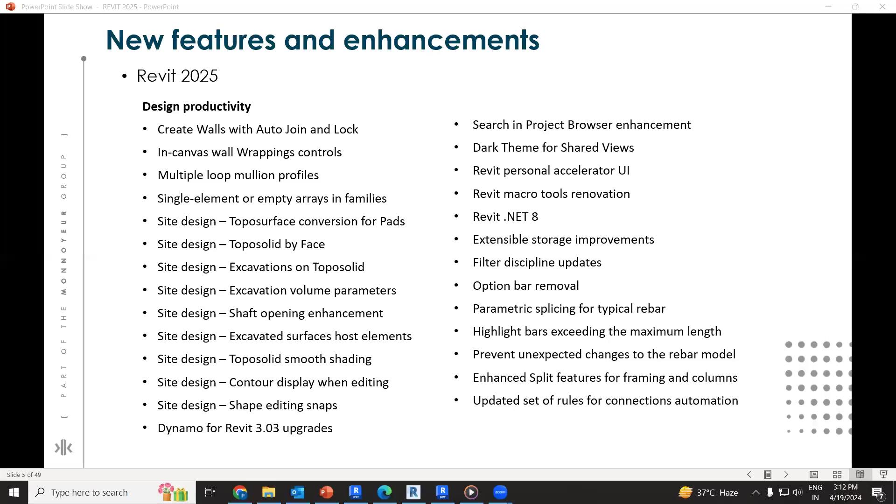This is divided into four to five parts. First we'll discuss the architecture features, then the structure features, then the basic analysis and sustainability features, and the last part will be model coordination, which is the most important thing once you are going for collaboration.

Let's see the architectural part, starting with walls. If you are creating wall finishes after completing all the brickwork in your project, generally what happens is once you're providing the plaster, your openings are not getting cut. You have to go for cut geometry or join geometry manually every time. This new feature comes in handy once you are creating finishes. It automatically joins the finishes layer with your brickwork, and if you have provided openings, all those openings will also be cut in the finishing layer as well.

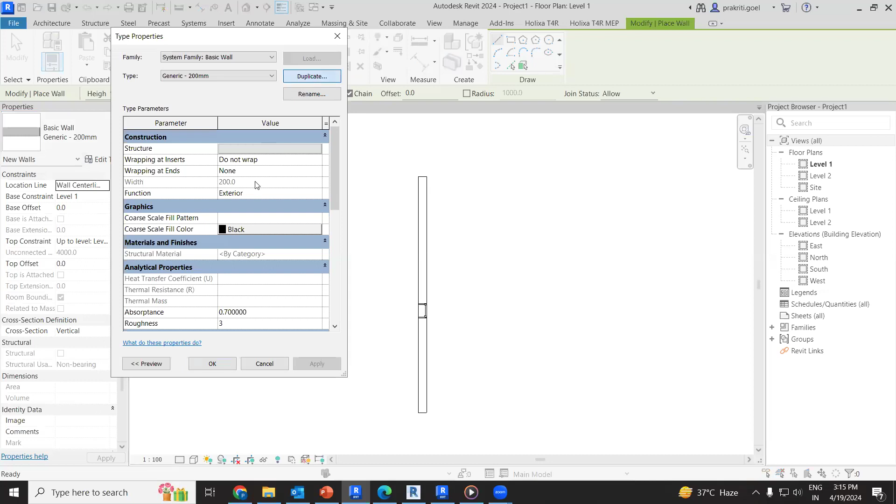If I'm placing the basic brick wall, and after that I want to provide the plaster layer, let's say you have already provided the window, and if I create the plaster as well. Now what I'll do is just place the plaster.

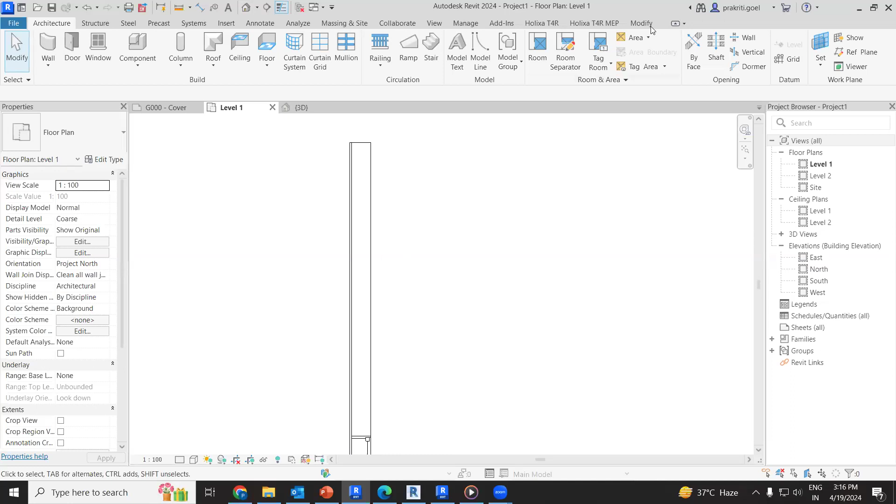So over here we don't have any option, we have to go over here and do it manually. By default, if you see, we have placed the layer, and right now in 3D you can see there is no opening getting cut, it is actually seeing overlapped. Now, in the previous version, I have to go to Modify, Join Geometry, then only your opening will be cut. But it has to be done manually.

So how is this beneficial? If you are developing the full project and you have completed it and now the finishing part is left, in the previous version it is difficult to join all the elements with the plaster walls. So this has been enhanced in 2025.

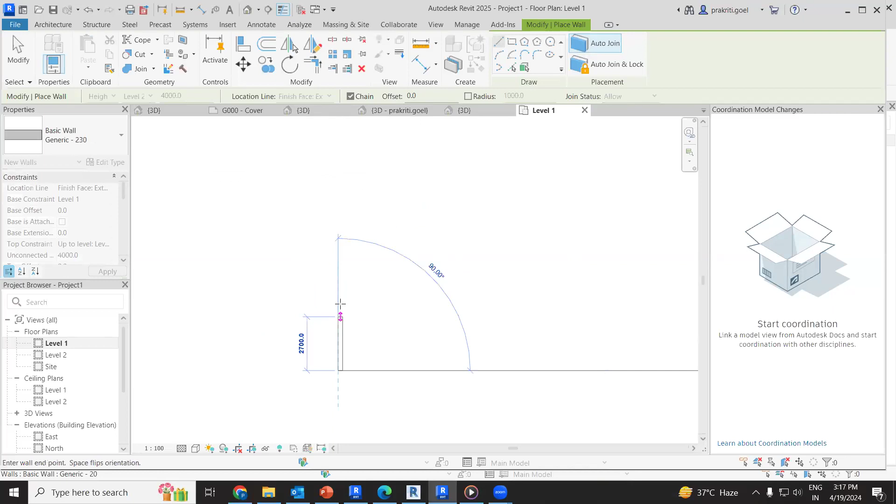So over here you can see, if I create a wall, if I create the same plaster over here, and then I'll place some window, and then I'll place the walls, the plaster wall.

So over here you can see in the Modify tab, we have Auto Join and Lock. You can actually lock your adjacent walls, the walls that are joined together. You can lock them as well. So let's see how this works.

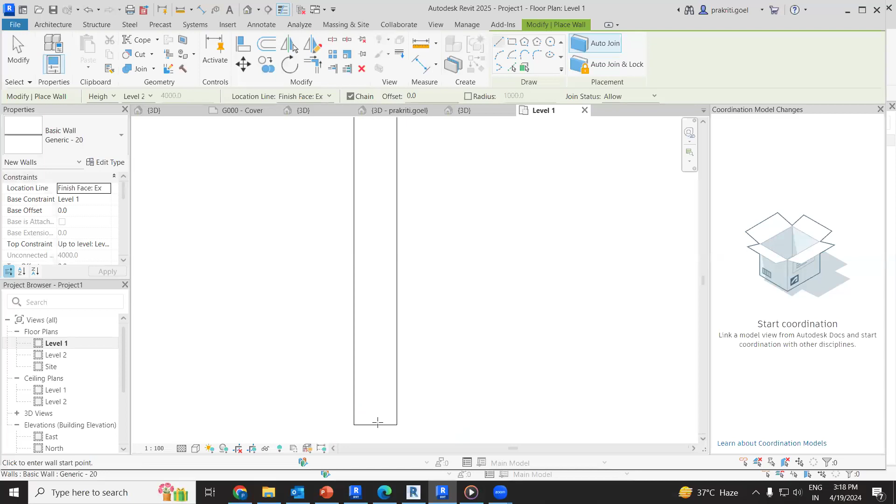So what I'll do is provide the plaster layer as well. So I'll be creating the plaster wall again. Let's create it, click OK. And now what I'll do is go for Auto Join, and then I'll create the wall. So you can see we don't have to go for Join Geometry anymore, and the opening is getting created automatically. So this Auto Join feature you have to enable it.

So again, if I go to maybe texture, you can see this is a separate wall. And if I change it... you can see, automatic join is actually very helpful in this case, especially if you are creating a full detailed model with finishes. So this actually helps in that case.

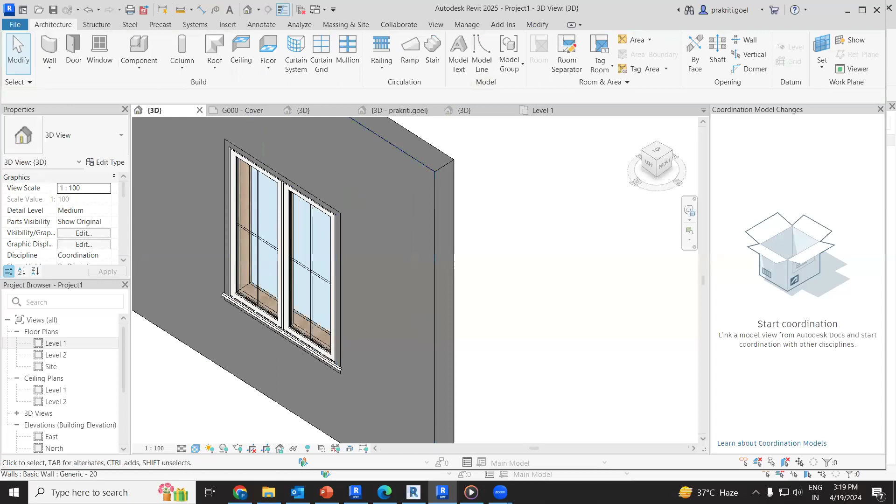Next, the second thing is the wrapping system. We all know wrapping has been there in the older versions. Why does this help you? Sometimes you are creating a wall and you provide wrapping on both ends, so it's your choice where you want to wrap. You can see at the ends there are two demarcations of the wrapping system.

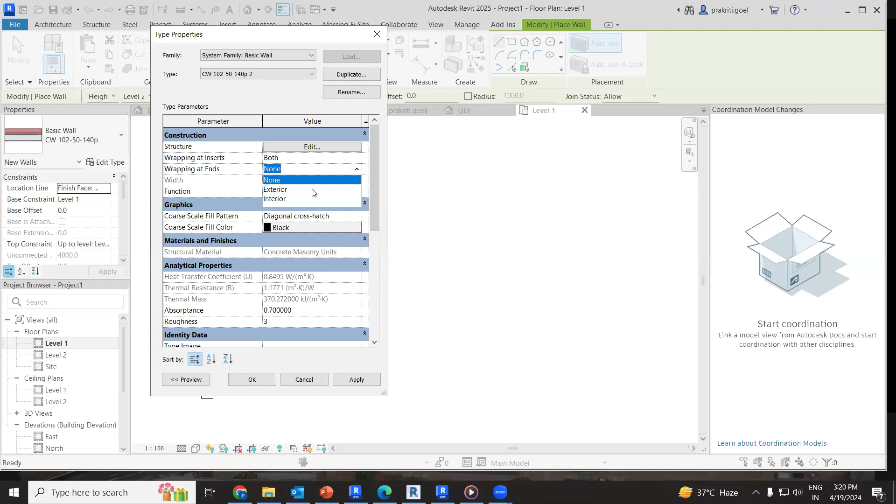So if you want to wrap or not, if I create a compound wall and wrap it on both sides, I'll go to Duplicate, then Wrap at Inserts, then Wrap at Ends, go for Exterior, and apply it. So you can see by default the wrapping is done, but I have the flexibility to change the wrapping system like this.

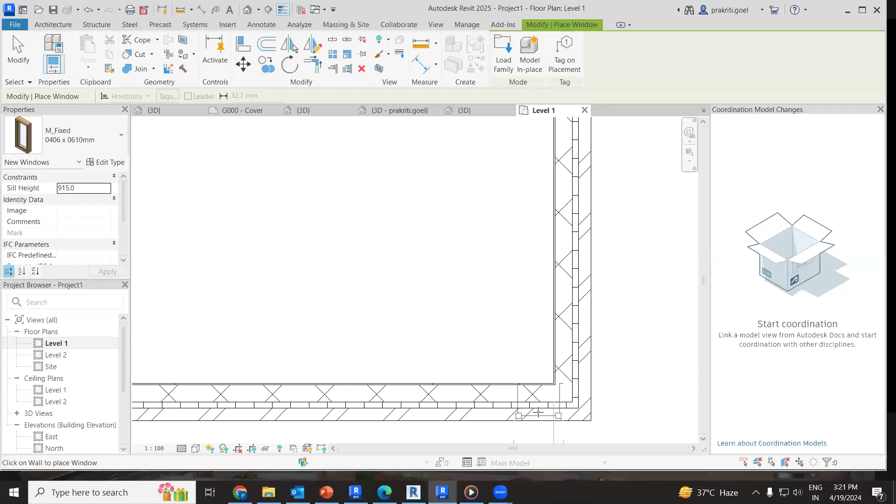So whenever you need those wrappings around the corner of your projects, if you have your wall with hollow cavity walls, and you are providing the joinery details of how your plaster finish is actually fixed, you can actually go for the wrapping system.

Next, I think this is the most effective enhancement they have provided in 2025, the multiple loop mullion profile. If you are developing mullions, we all know mullions are actually detailed, they are sections, box sections, certain box or circular sections are provided. But in Revit by default they are created as a rectangular portion, and in section in 2D you have to draft it, provide the details in 2D. But in 2025 you can actually create multiple mullion profiles in one single family.

So let's see how this works. If I create any mullion family, or if I just modify one, so I'll create a storefront.

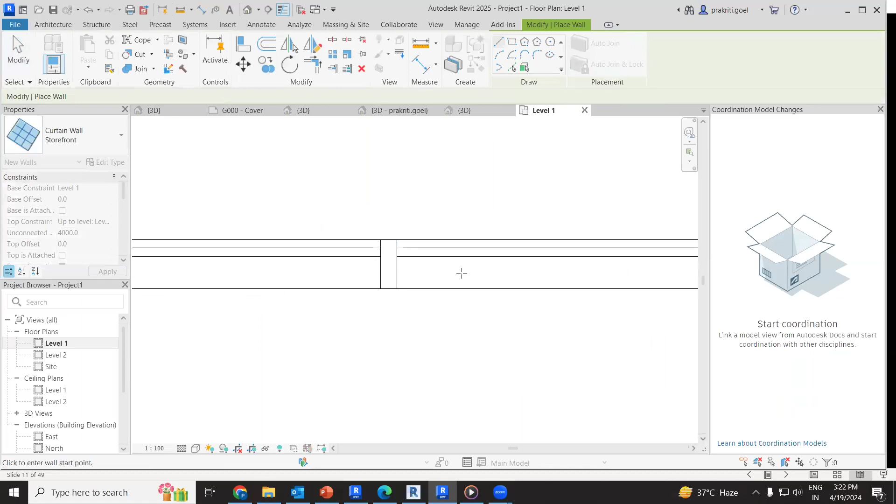So over here you can see only these rectangular mullions are there. Now I just want to edit them, so what I'll do, I'll just go for open. I'll just open the family over here.

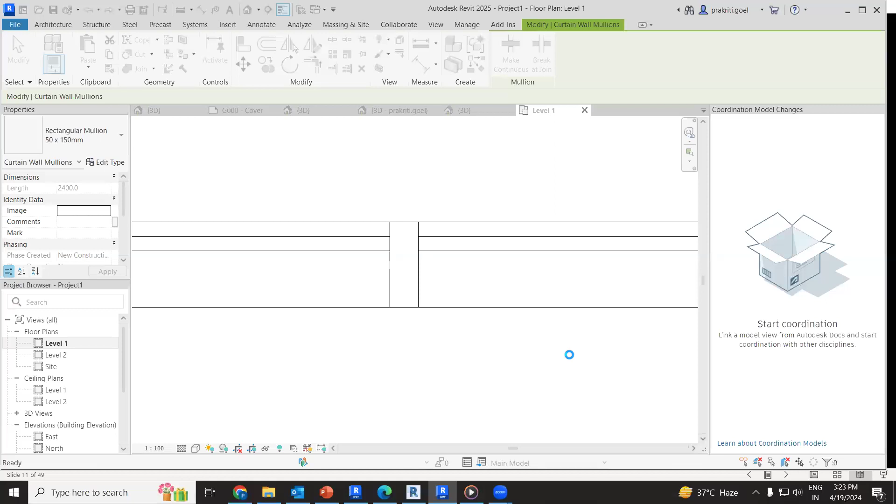So I'll just go for profiles, curtain walls. So over here we have mullions. These mullions are those which have 2D detailing. So if I open this one rectangular box, like if I open any family, you can see the detailing. This detailing is actually a detail item, like it is actually only a 2D element.

But if I delete this, you can see it is actually like this. So if you want to create a box section, you can do that. What I'll do, I'll go for create line, and then I'll go for offset. Let's say if I have the box section of like 10 mm or maybe 5 mm, or maybe 2.5 will be enough.

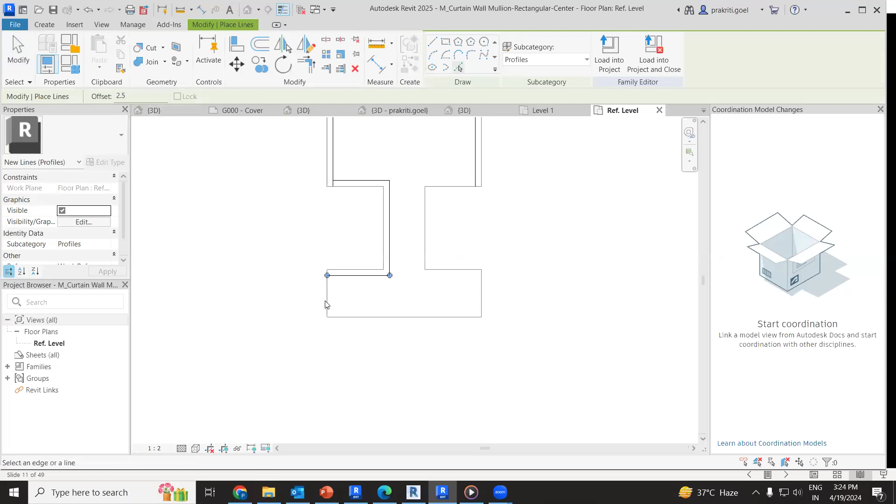So it is actually creating a multiple loop. And then I have to choose the same category, and let's say...

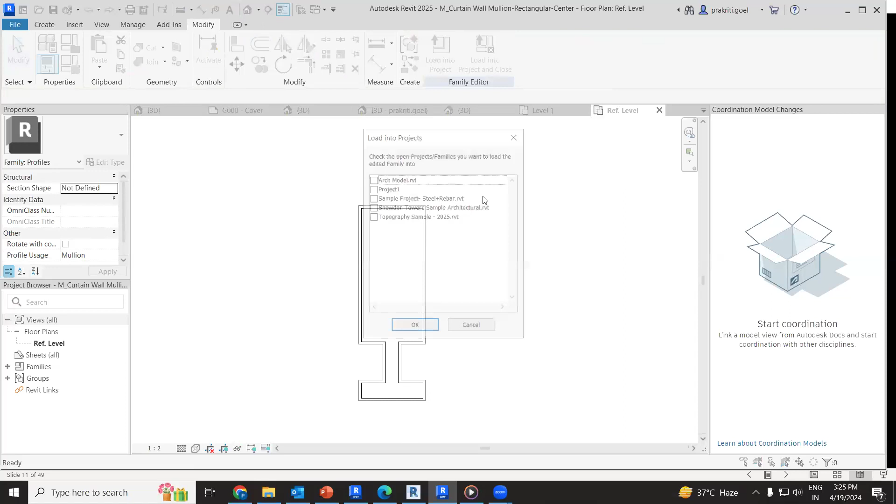Right now, what I'll do, I'll just load this into the project. So the project will be this one. Now what I'll do, I'll just specify the profile.

So over here you can see we have this profile default, so over here we have to choose that. This is actually center, so rectangular center we have modified it. So I'll go for apply, click on OK. Now you can see the difference, right?

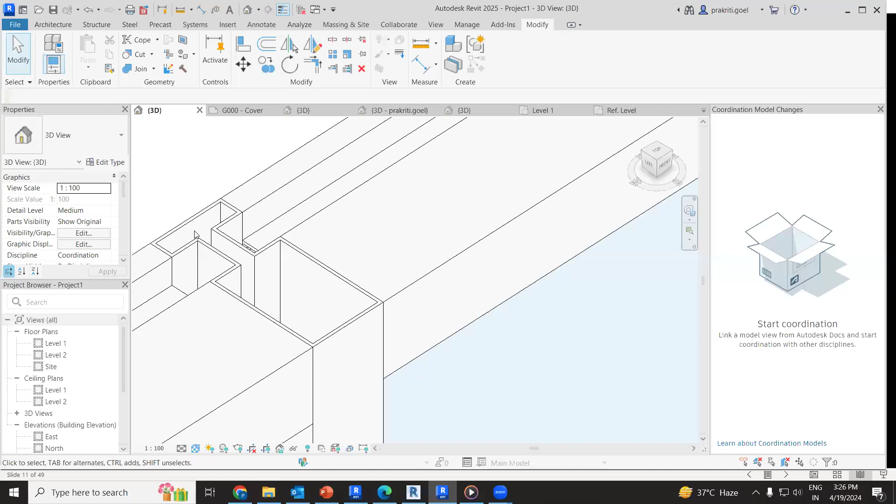So you can actually create detailed mullion profiles according to your project, which helps if you have intricate designs, so you can create it in a profile and it will be created. You don't have to go for a hollow section or solid box, and you can omit that detailing part as well. So everything that you are detailing is actually there. But again, if the lines are intersecting, it won't take. So remember, it should be a simplistic line, and the line should not be intersecting. So this is how the enhancement has been done in the 2025 version for the walls part.

Now the single element, like the array. So once you are creating array families, by default, if you place any chairs on the tables, the minimum amount of array we can provide is actually 2. But it is beneficial, like if you are creating a dining table set, 4 seater, 6 seater, 7 seater, in some cases you need a 2 seater as well. So in that case, how should we proceed? This single element or empty array in family can be helpful.

So if I open any family, just give me a minute. So I'll take this, and I'll change the sizes for the time being.

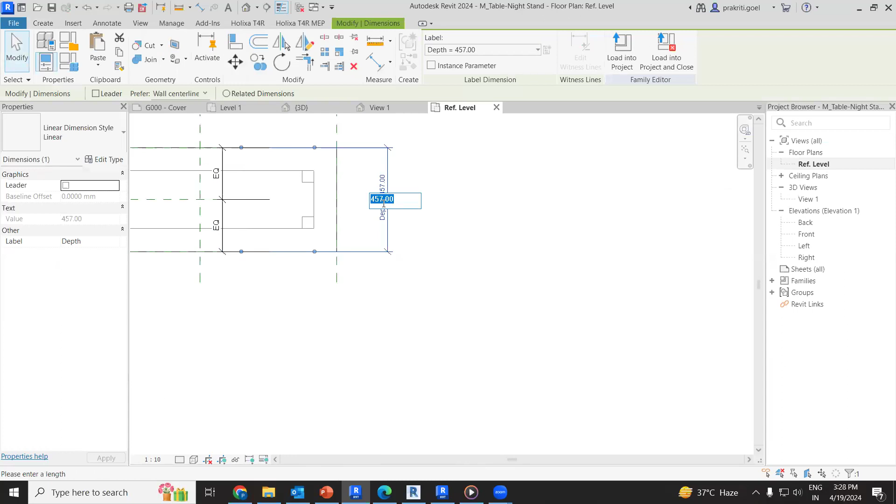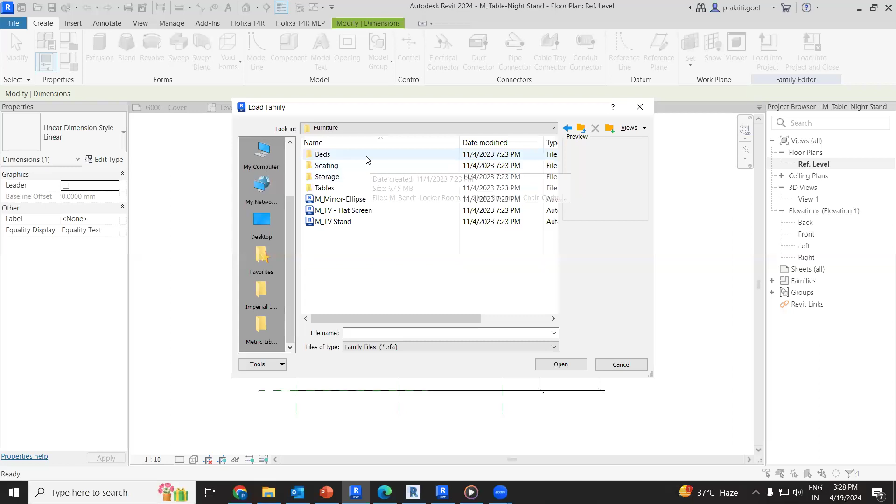After that, if I want to provide arrays of chairs, so this is the 24 version, you can see how we can provide the arrays over here. So the number of elements we can control if you are placing the chairs. Let me include the component as well, so I'll nest the component that is the chair family. I'll go for task chair and place it over here.

So let's say if you are providing like 2 meters. Now I want to place it, so let's not take this one, I'll just go for load family. Let's take this one.

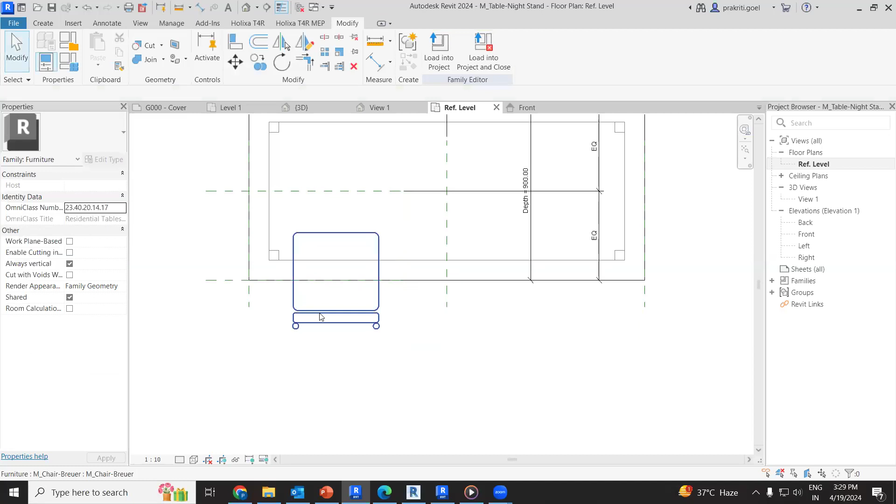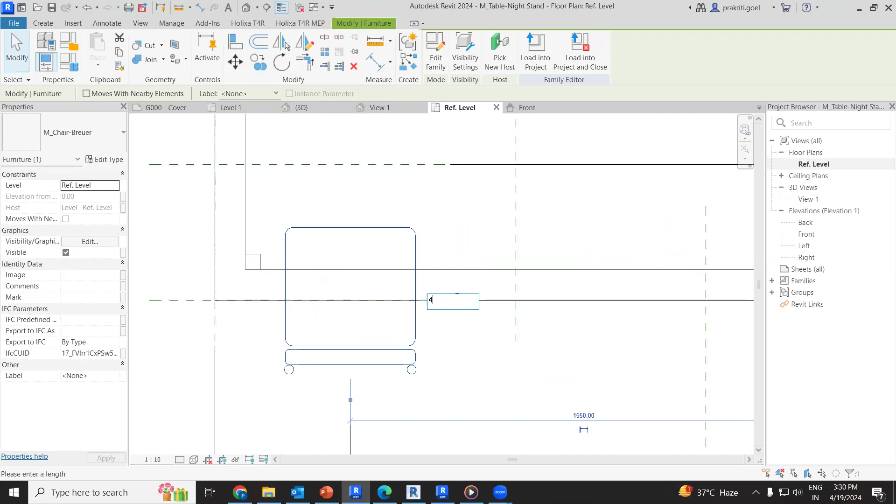So I'll just need to provide the placement, like where the chair will be placed. I'll just provide some reference planes. So I'll place it over here. So the first chair I'll be placing.

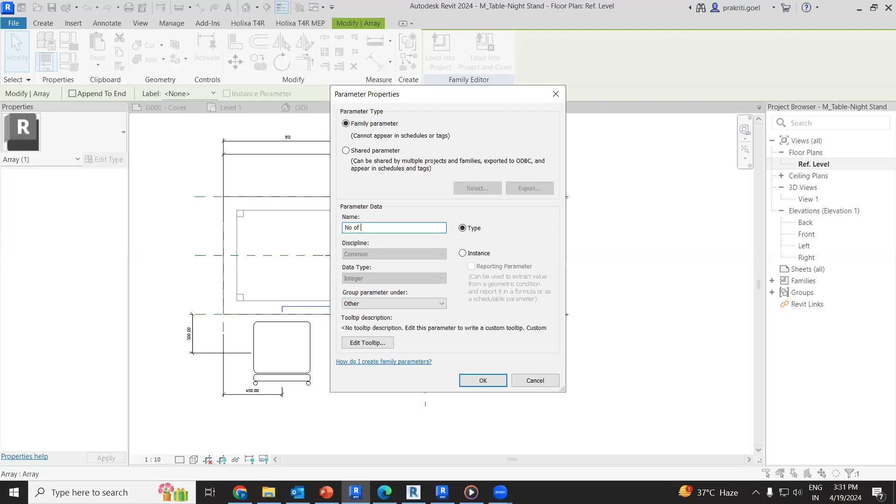Now, why I'm showing it in the family template is because this array enhancement is actually only in families, so that is why I'm showing this example. So what I'll do, I'll just go for array, then I'll go for move to last. I'll give this as a parameter. Now what I'll do, I'll just lock the position of the chair as well.

Now, if I change the number of chairs, as you know, by default the minimum value of array elements is actually two. So if I provide one, it shouldn't work, right? But in 25, it will work. First of all, you have to understand this is actually the 24 version. So what I'll do, I'll just save this family, and let's open it in 25.

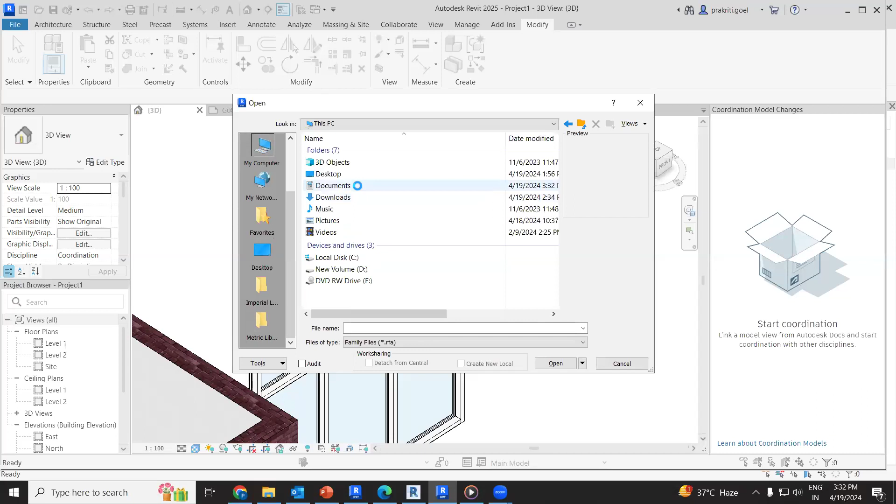So I'll go for downloads, like documents. This is the one, so I'll open it. It's actually updating, right? So I'll continue this. Now what I'll do is just change the parameter to maybe one.

Just observe. You can see over here. You can actually go for visibility turn on, so only one chair will be visible. So again, it is more efficient for creating two seaters or maybe three seaters.

You can actually go for multiple permutation combinations for a single set, like a conference table set or maybe dining table set. So using this type of families, you can create multiple portions. If you are developing a baffle ceiling, at certain length only one baffle will be there.

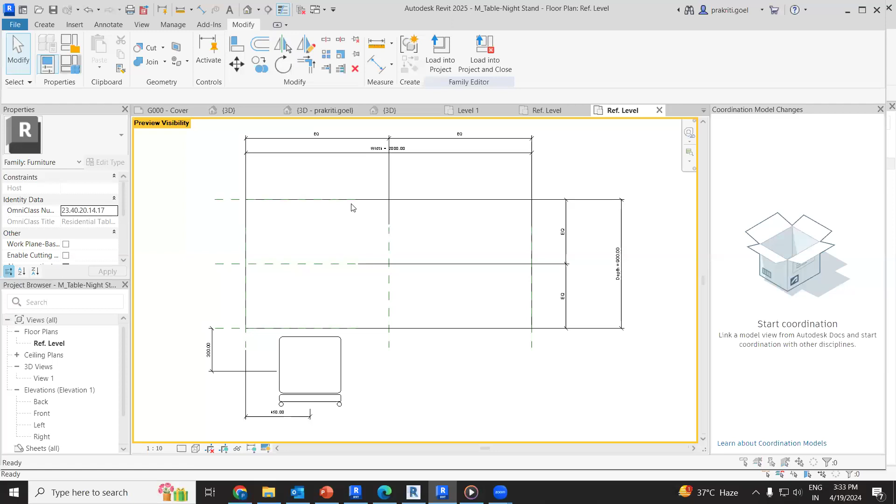So again, you can create multiple permutation combinations using this single array or empty array also, and you can actually provide zero information, zero number of elements as well. So you can see that. This is one enhancement in the family creation.

Next is the major thing, that is topo solids. As you know, topo solids are there from 2024 onwards. Now certain parameters, certain things which were not there - like if you are creating building pads in your sites, if you are developing your site providing hardscapes and softscapes using building pads - generally what happens in 2024, the building pads are not converted.

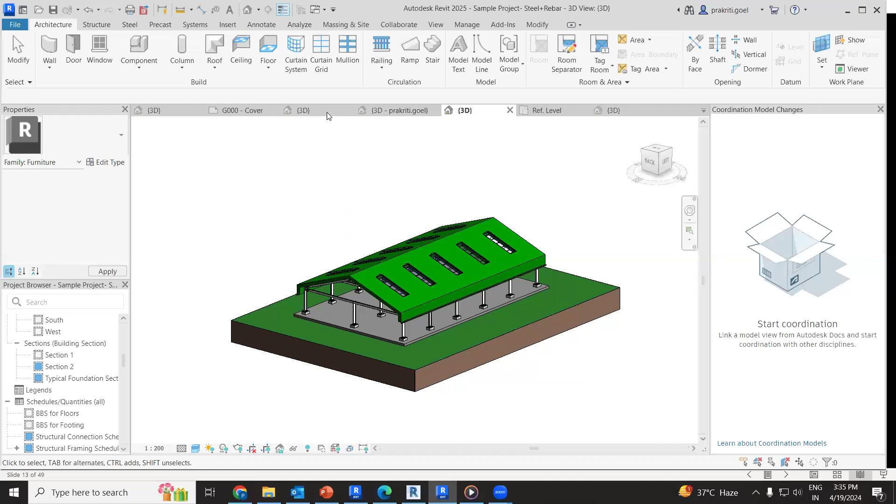So generally if you convert any topo solid, the building pads will be deleted. So if I show you over here, this is actually your 2025. So if I open the site view - this is the topo surface, the topography from the 2021-22 version, and I have just opened that same file over here.

Now, right now, because this is your topo surface and we have created a building pad over here, you can see we have a building pad, right? So if I open that sample file, you can see this is the topography sample. Over here, we have provided the site, we have graded it so that we can get the exact cut and fill volume, and you can see over here we have building pads. This is the building pad. This is a building pad.

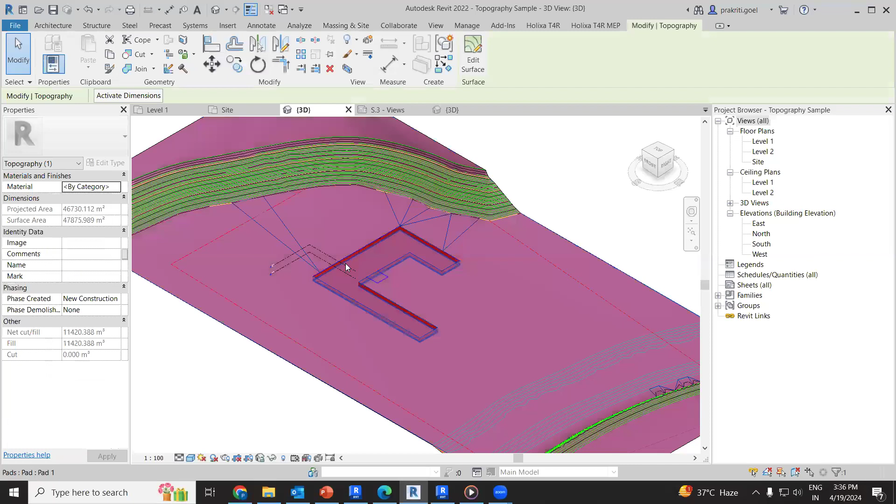Now, by default, if you open the same file and convert it to TopoSolid in 2024, the building pad will be gone. So it will be a difficult task to provide the excavation.

So now in 2025, if you see over here, the same file has been opened. Now what I'll do is go select the topo surface - I'll select all the topo surface. So you can see we have two topographies over here: one is existing topography and one is site proposal. I've graded them in the earlier version.

So what I'll do is select the old, the existing topo surface, the existing site, and convert it to topo solid. So from here, generate topo solid will be created. Right now it is saying - just observe what it says over here.

When generating a topo solid, consider the following: subregions are converted into topo solid subdivisions, building pads are ignored, railings are rehosted automatically, other hosted elements need to be rehosted. This kind of notification comes in 2024 as well, but what is the difference over here? So if I click OK...

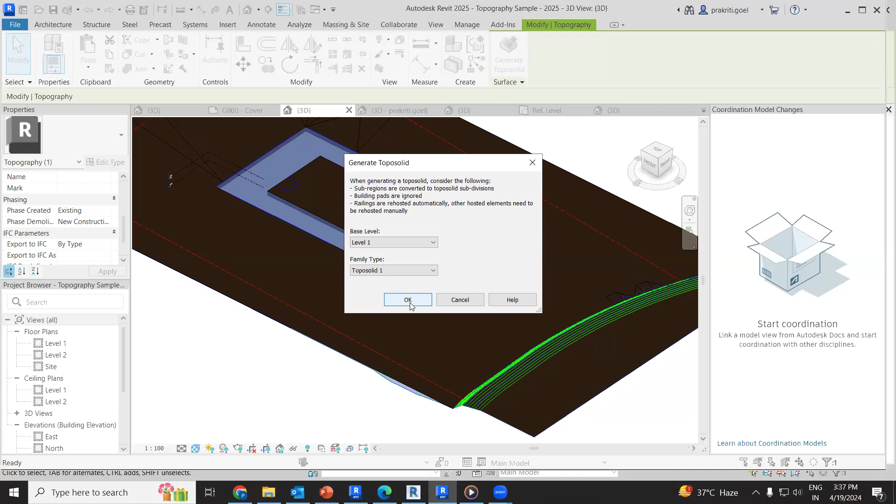So you can see, first of all, this is the existing site. Now what I'll do is just hide it for the time being. And this is our original site. Let me just go and convert it again.

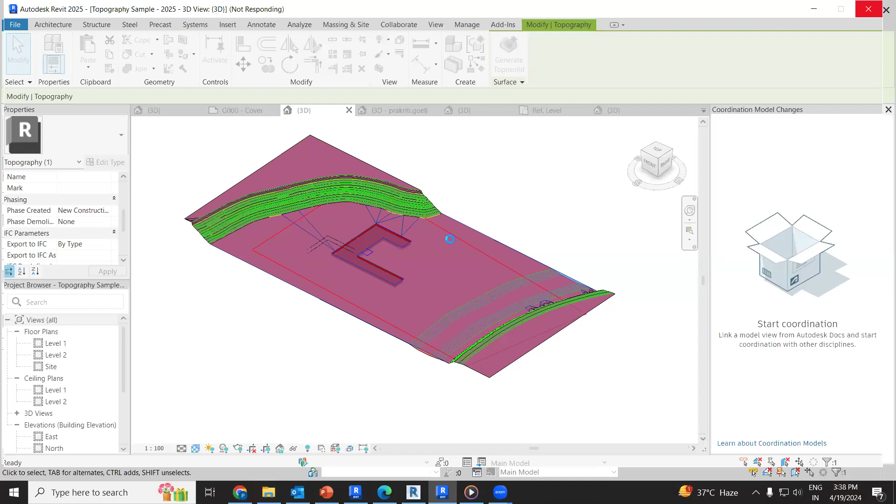And just observe the building pad - just observe the building pad. So that building pad will be converted as an excavated area. So your building pad's whole component will not just be shifted and converted as it is - it will be converted as an excavated area.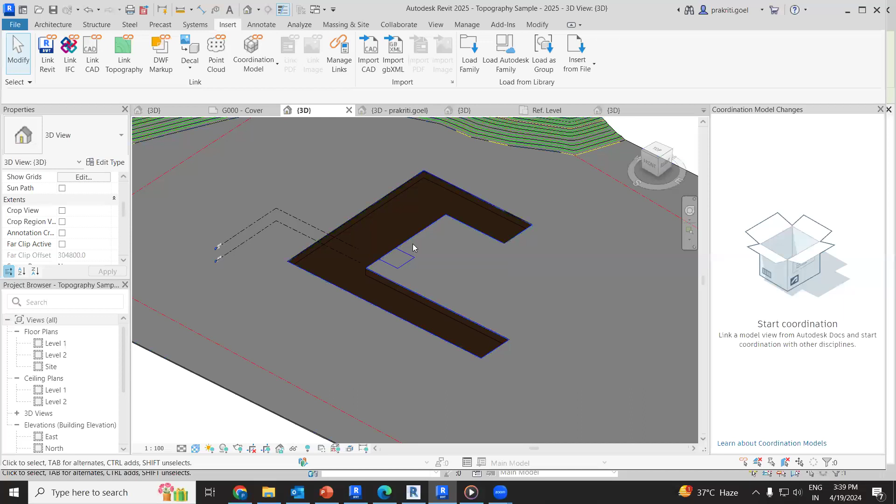So as you can see over here, the excavation has been done. So the building pad is gone, but again, if you are converting a site which was created - if you're converting the site over here, just observe, if I create a section over here, you can see that the excavation area is actually created. So this is your excavation area, as you can see over here.

So building pad as a component will not be converted. What happens is they've used a concept called excavation area. In 2024, only subdivisions like sub-region and split surfaces would be converted, but now the building pad is also converted into a different component, that is excavated area.

As you can see, the excavation is actually over here. But if you want to provide excavation, how does it work? You just need to provide a footprint, like if you're providing a PCC layer for a raft foundation or any foundation, you have to provide that layer and the height offset. So let's say if I'm providing the PCC over here.

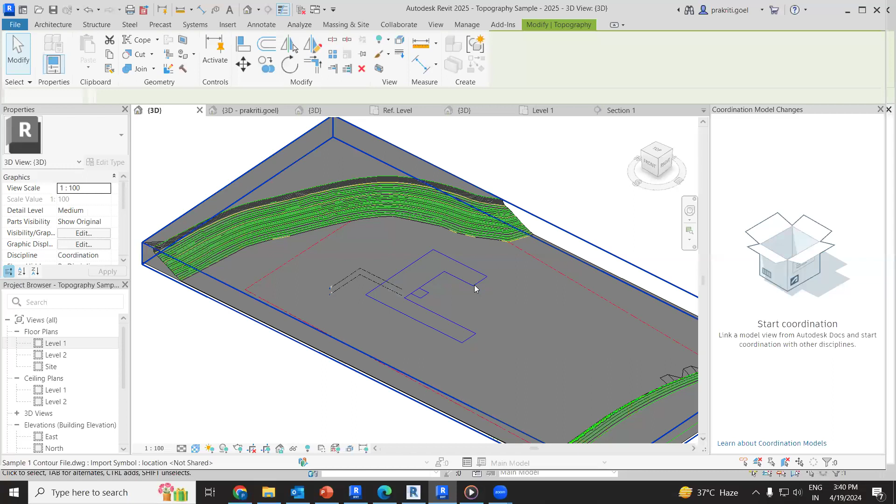Right now let's delete this excavation area, excavated area. So what I'll do is create the floor plate, like the PCC layer, and then I'll provide the height offset. So what will it be if I have a basement over here?

First of all, I need to provide the layer, so that will be like maybe 3 meters, and above that we'll have the rammed earth, and over here we'll have the grass, so sand and grass. Let's say this will be maybe 50 and this will be 100 or 250, and let's say this will be grass.

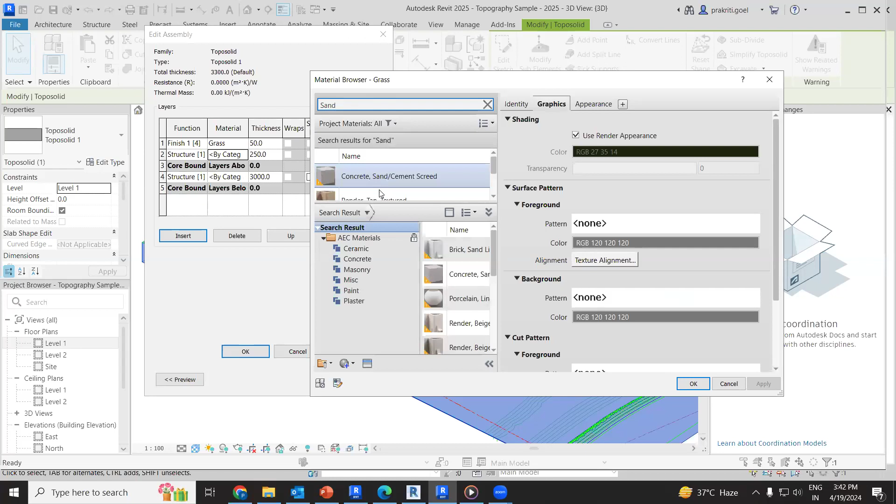So I'll use it over here. This will be, let's say, sand, and so on. Click on OK.

So what it will do is create the solid layers, and then what we can do is just go for the...

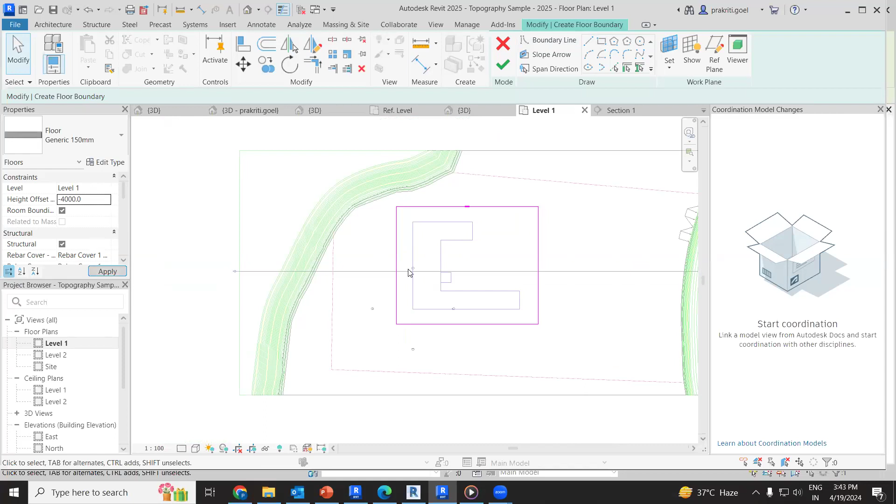Now, in this case, what I'll do is provide a slab where I'll give the PCC layer, and then provide, let's say, if this project has a basement, it will be like 4 meters, minus 4 meters. Click on apply, click on finish.

Now what I'll do, it is actually overlapping. So what we can do here is go for excavate. I'll go for excavate in the modify tab, toposolid shaping, and we have excavate. If you select the toposolid, only then will that excavation part come. You can remove that excavation and actually go for excavate.

Right now you can see the cut and fill volume, because we are modifying it in the new site, so we have the volume as well. So if I go for excavate, I'm selecting the file, I'm selecting the slab.

You can see over here, if I go for a shaded view, you can see that portion has been excavated. First of all, I have to change the range. This will be 5 meters.

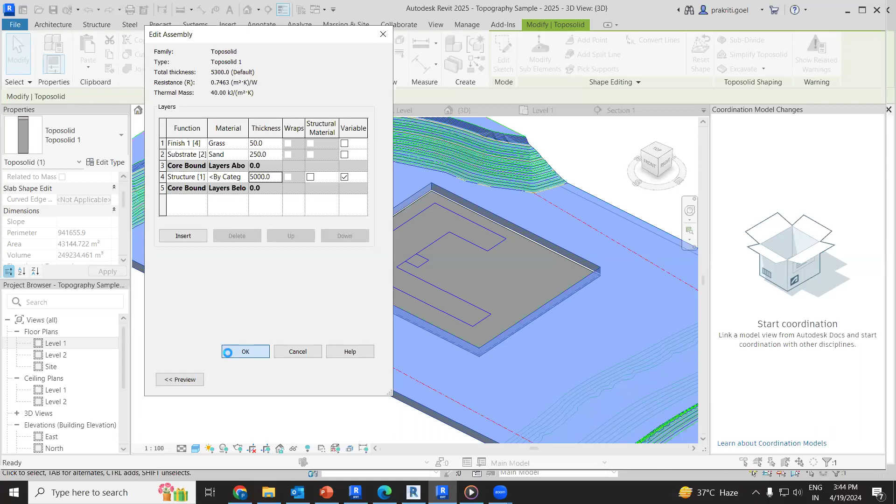Now what I'll do is go to the section. You can see the excavation part is over here, and you have this PCC layer. So again, it is now more accurate to create your site developments, now more accurate. So again, you can see over here.

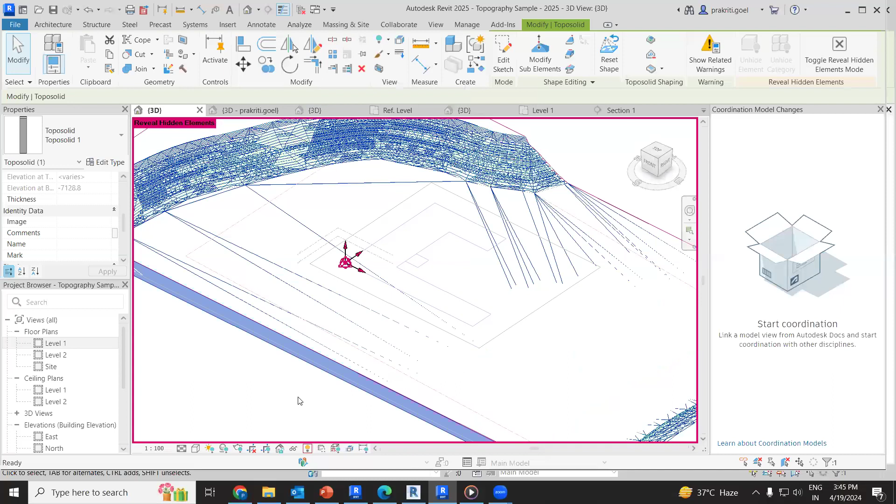Right, so I have highlighted it. So you can actually go for individual excavation. If you have multiple towers, you can get how much each and every tower has excavated, and get the excavated volume as well. So this gives you the exact cut and fill volume of the site.

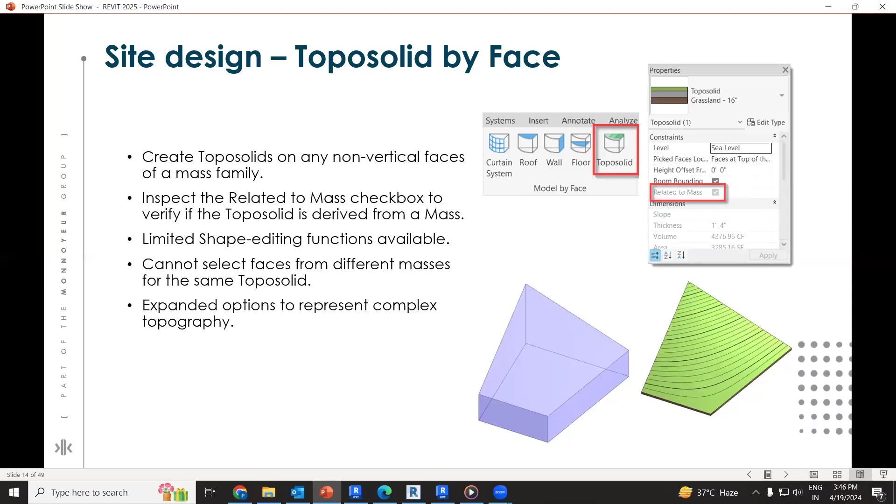Next, a few enhancements we discussed: if you have created the site through massing, massing can also be converted into a topo solid. We have in the model by face panel, topo solids.

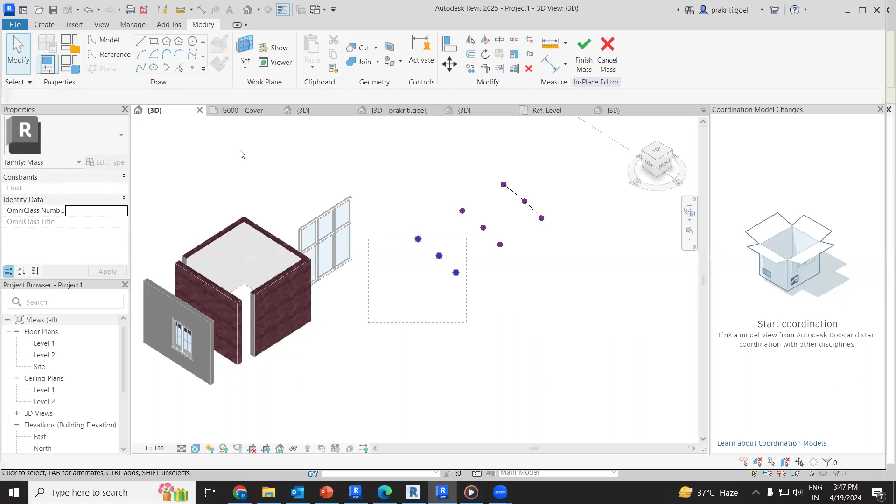So again, if you have created any mass, let's create it over here. If I go to in-place mass and go for point-based massing, where we use points and then connect them together, and I'll just connect it.

So any contour shape, any smooth contour shape you want to create, you have to just create a mass and then go for the massing and site tab, model by face panel and topo solid. Then you can select the face, select the mass, and go for create topo solid. So your topo solid will also get created, and it will be updated according to the mass. If you make any changes in the conceptual mass, your topo solid will also get updated.

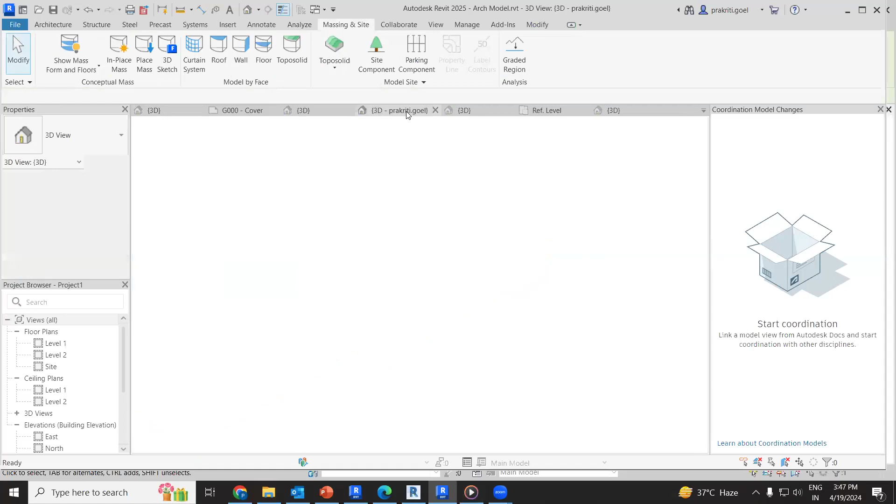So this is the enhancement for the site developments. And if you want a smooth curvature, like smooth contours developing, so if you want your contours to be smooth, if I open... let me delete this CAD file.

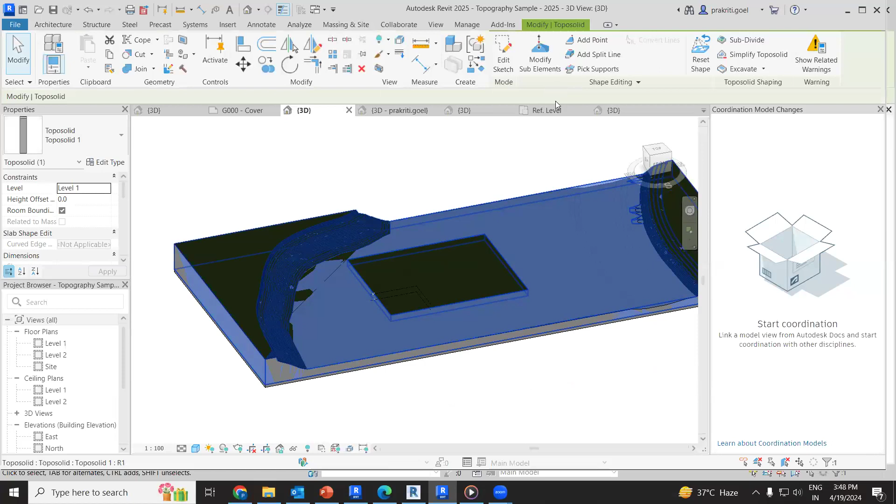So over here, you can see the lines are actually there. If you want a smooth surface, you can change that as well. If you select the surface, in the shape editing panel you can go for simplify topo solid. You can simplify them according to the points. That is a new tool for topo solids only. You can actually go for that over here.

Okay, so over here you can see if I go for shape editing. If you are creating a building part, like a building or building footprint, you can align your points accordingly.

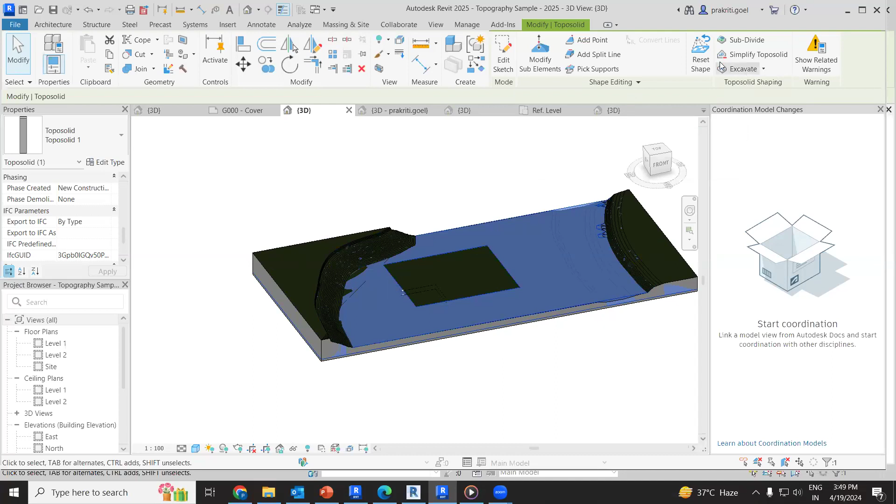Now you can see over here we have, in the massing and site tab in the model site panel, topo solid smooth shading. Over here you can see that the line work, the representation of your topo solids, will get smoother. Right now the contours are not that many, but if you have a vast number of contours, the surface will be smooth. So more enhancements are there in your site development.

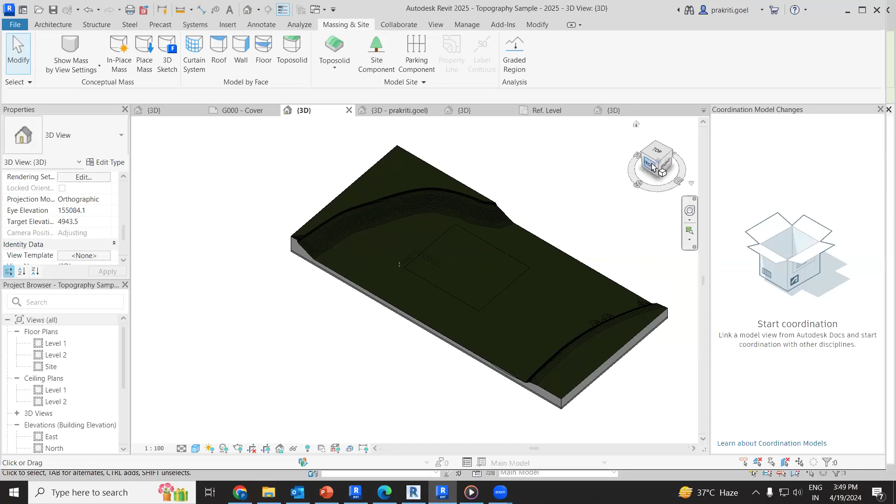After this, we have discussed the topo solid part. Now we'll discuss the working drawing. This is important: if you are developing various sheets, you can collect them and group them according to the design stages, like conceptual stages, based on what type of drawings are there. So you can create sheet collections, and create a schedule out of that.

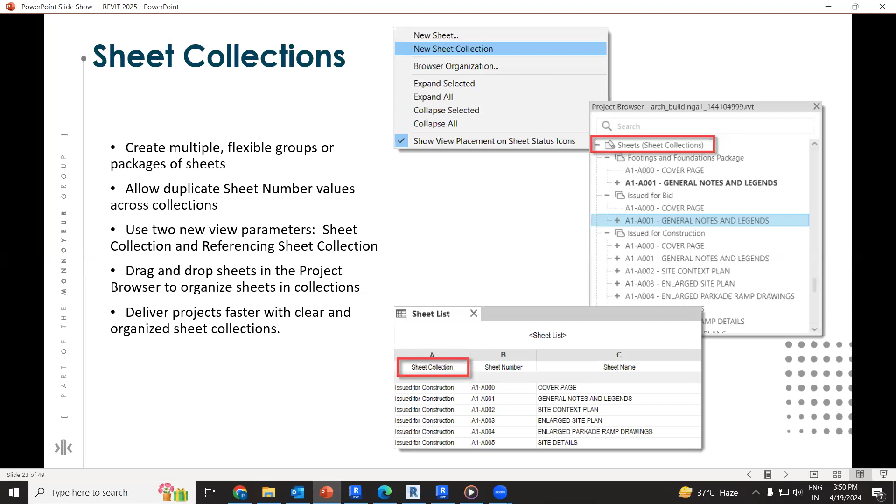If I open a project which has all the sheets, you can see in the project browser we have various sheets, like for working drawings and presentation drawings. You can group them according to stages or according to discipline. If I right click on sheets, we have sheet collection, which is a group in which you are grouping your sheets. If I go to new sheet collection, I just need to type in the name - let's say conceptual, presentation drawings, or working drawings.

So whichever is the original sheet collection, whatever sheets you've created, you can see which sheet collection they are actually in. What I can do is select a few sheets, and then change their sheet collection property over here in the property palette. I'll go for working drawing now - just observe, it has been shifted. I'll change it again over here, like this. So you can group them according to design stages as well.

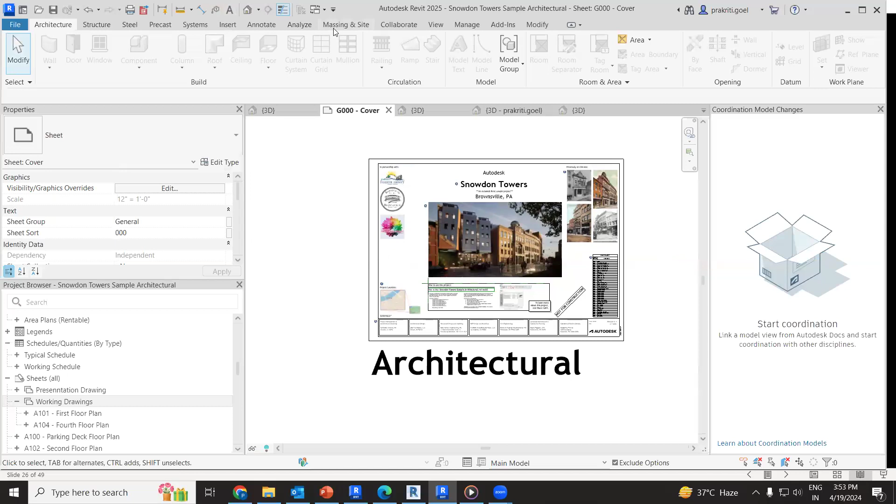Now this important feature that you are seeing, the render appearance - how your material will look after render - in 2025 is the most amazing feature. If I go to the manage tab, settings panel, materials, and select any material, your appearance will change according to the render quality.

So over here if I select this one, maybe this one - let's go to appearance. Right now you can see how this appearance will look. We have render settings, and this is actually quick render. If I go for draft quality, the settings will change.

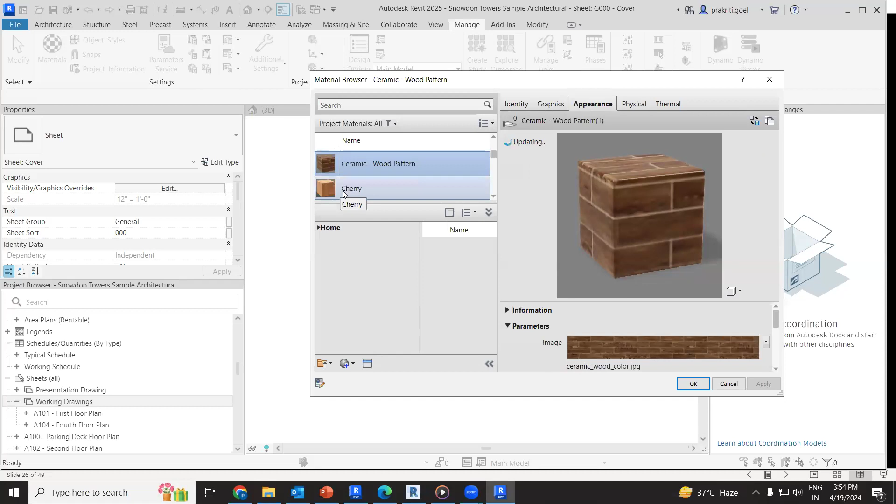Because it is actually rendering the whole material, you can see the difference, right? So you can actually perceive better now how your material will look after you have created high design, high render quality. So if you go for production quality, it is actually fully rendering the material, right? This is how it actually works in the 2025 version, right?

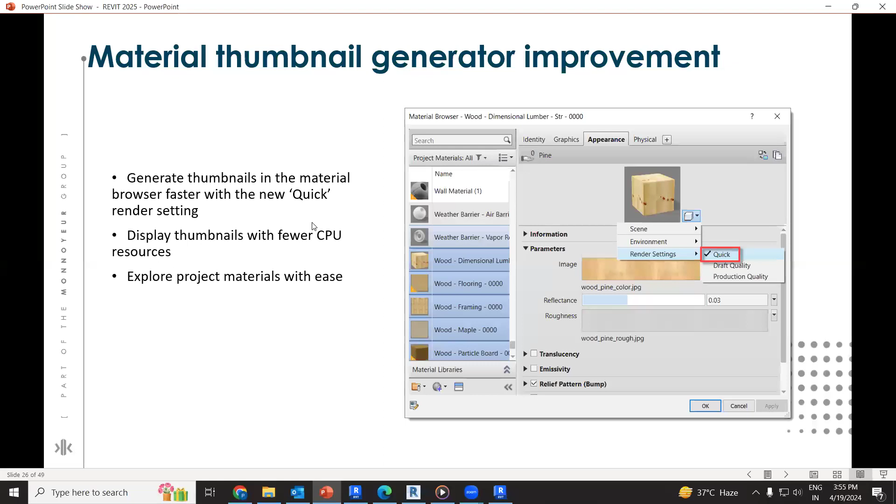Next, if I talk about alignment, so if you are providing tags, you can actually align them together. We have multiple alignments, like center alignment, right side and left side, right? And all the tags that you have created will be aligned together.

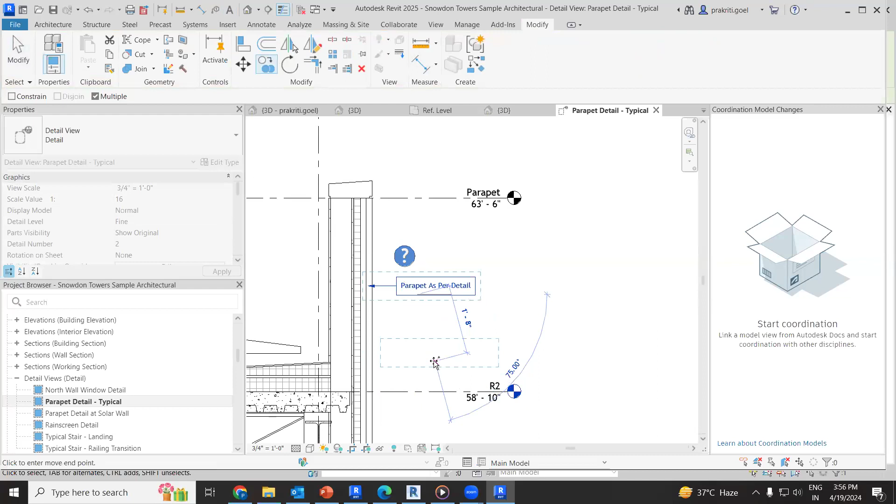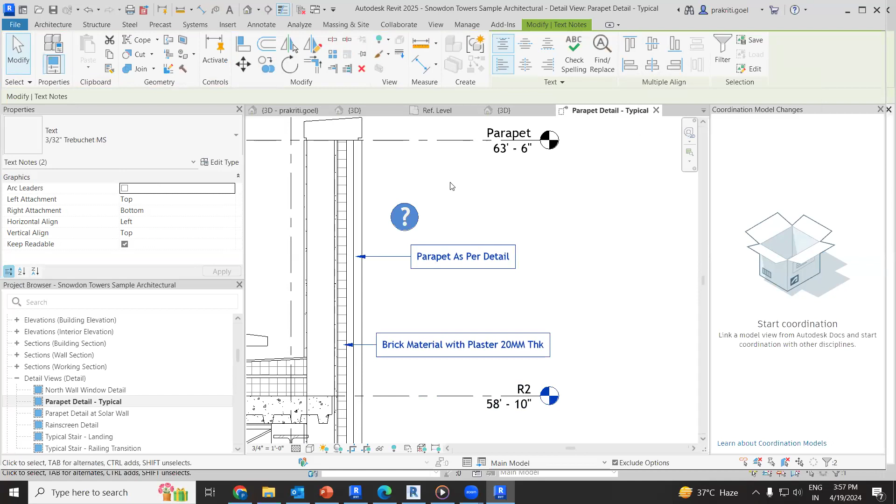So let's say, if I provide any tag over here, any text-based information... so it's like that. If you are providing all the information, now what I can do is select these tags. Whatever text-based information you have, tags or text, you can select everything and then go for aligning. Over here, multiple align. If you go for alignment, again you can see the texts are actually aligned according to the center of the placement, center of the text, right? Similarly like this, right?

So in one go you can actually select multiple alignments, like this, right? So these are the basic enhancements that you have in the architecture part.

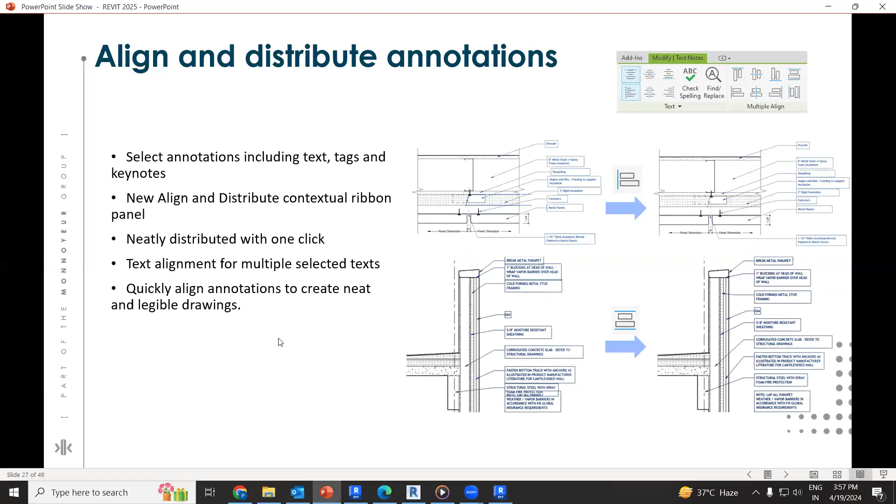One is the batch export — if you are exporting your PDF, it shouldn't stop you from working, right? In the background the PDF exporter will be carried on, and once it is completed it will give you a notification, right? And the room perimeter accuracy has improved — if you have a curved space or a regular room space, your perimeter and area calculations are now more accurate. So again, these are the basic enhancements in 2025.

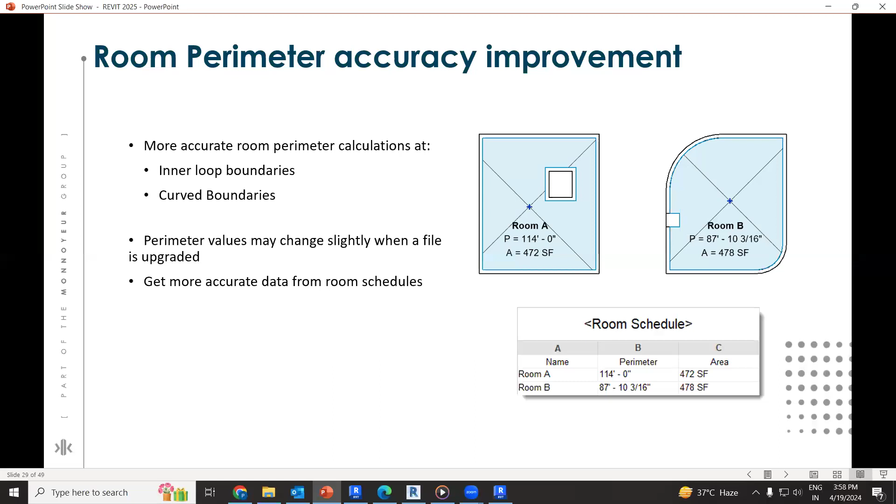Now we have another thing, the Revit Personal Accelerator, to accelerate your project. It accelerates your speed, your project delivery, right? So it optimizes performance when working on Revit cloud models — basically it is for cloud models, right?

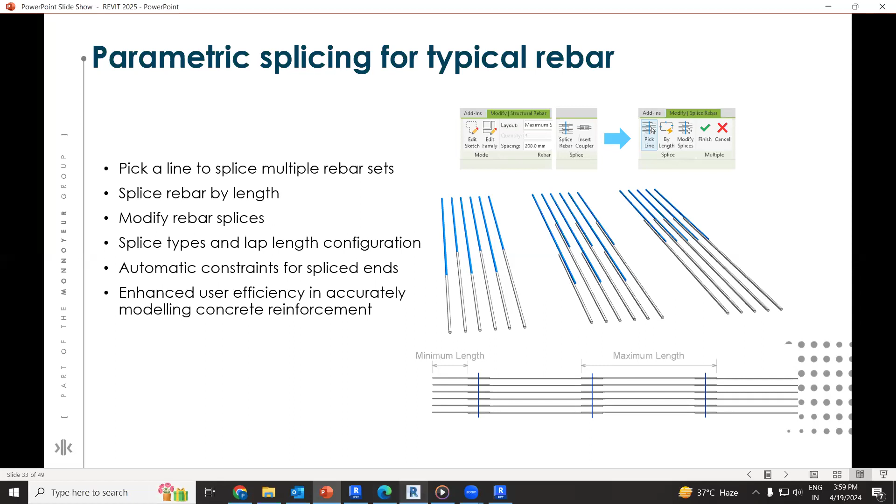Next, let's talk about the structure part, where we have all the rebarring, and the steel connections, right? So again, all the enhancements are there for rebar, like if you want to splice the rebar. So if I open any rebar project...

First of all, in 2025 the major change is the interface. If you see over here, in 2024 you will not find that new Revit Home option. So if I turn this on, the full interface will change — the homepage of Revit will change like this. Even for cloud projects, that will also be changed.

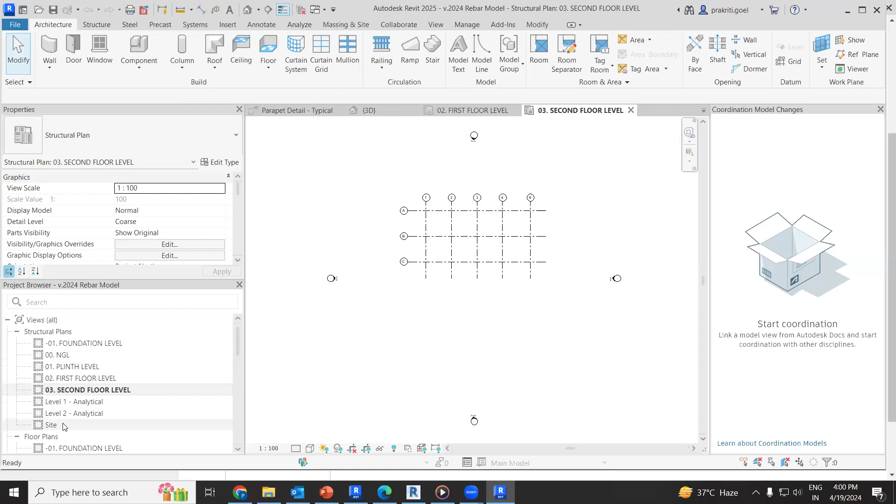Wherever you need couplers, right, what you can do is actually split the rebar segments according to the length. So if I go to any maybe 3D model, will be okay. So over here, you can see these are the like we have. So if I go to any section...

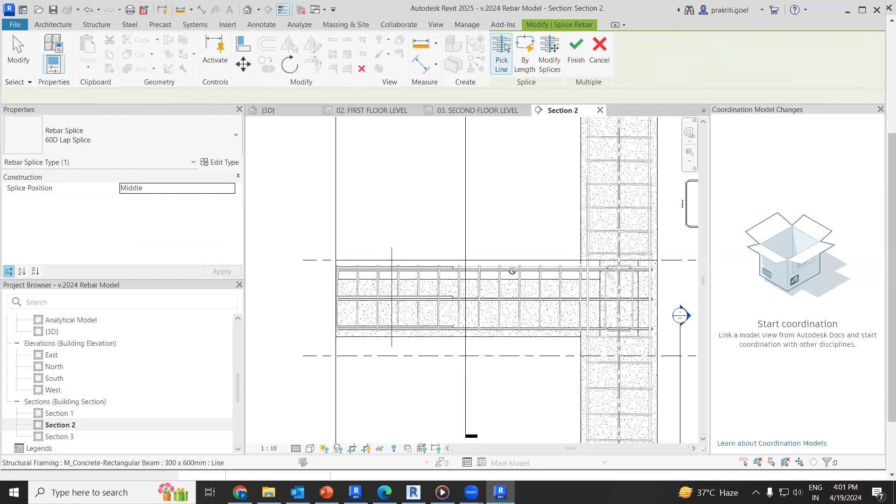So if I want to split the rebars, right, what I can do is select the rebars, and over here we have the splice option. Splice can be done through length as well, right. So by length, and over here you can see how the rebar has been joined together like this. So the rebar has been spliced together, and now you can actually provide the coupler over here, right.

This is one thing. Now for tagging perspective, it is actually nice. So like in 2024 there's bar bending detail, right? Over here the slight enhancement is there.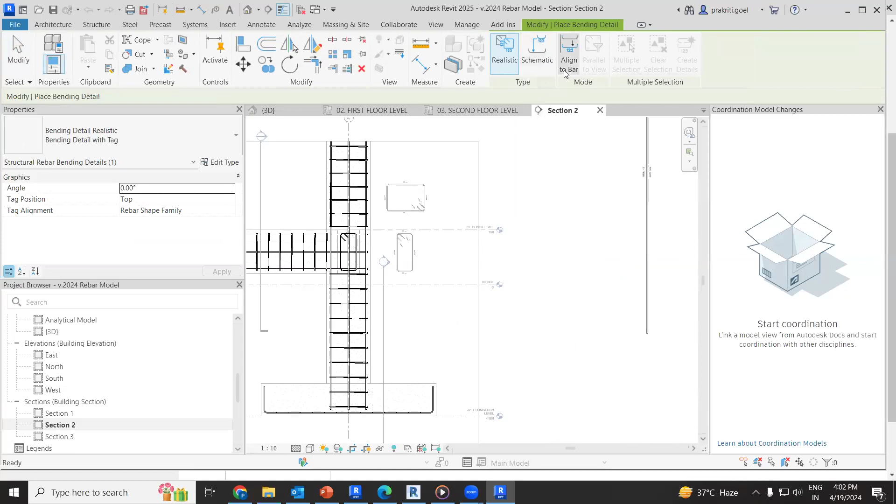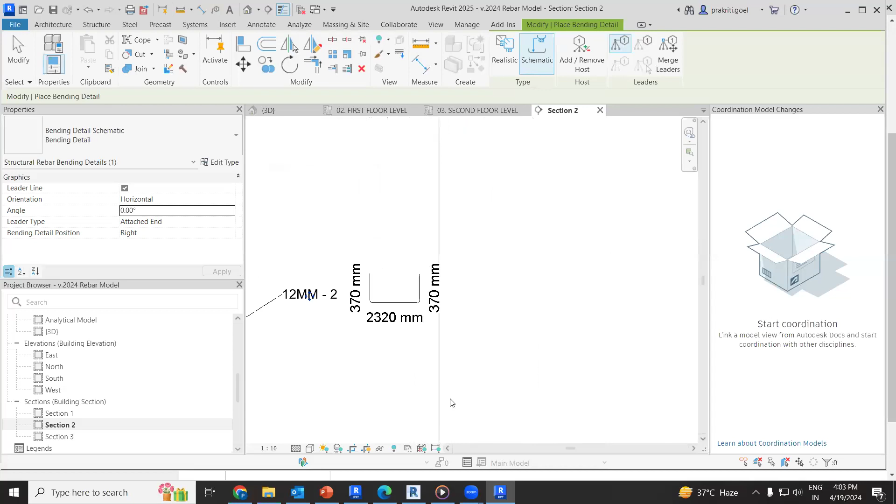If I select the rebar, we have this bar bending detail over here, the bending detail. One is schematic detail — it will give you a small kind of detail with the tags. If I select this schematic and this family, it will give you the tags as well, and the rebar symbol as well, and their length, right. If I provide it over here as well, you can see the whole profile, the whole section, the whole rebar detail with their dimensions, and how many bars are there. So you can actually provide — you can see each and every one is actually detailed according to the tags. So this is kind of helpful for developing the bar bending detail, right?

Okay, so now there are multiple features. In previous versions, if you provided steel connections on steel columns, the modification of that steel column via split element would not take place. So if I talk about the 2024 or 2022 version, if I split this column, because it contains sections like steel connections, the modification of this column will not work. So the steel column will be fixed in modules, right?

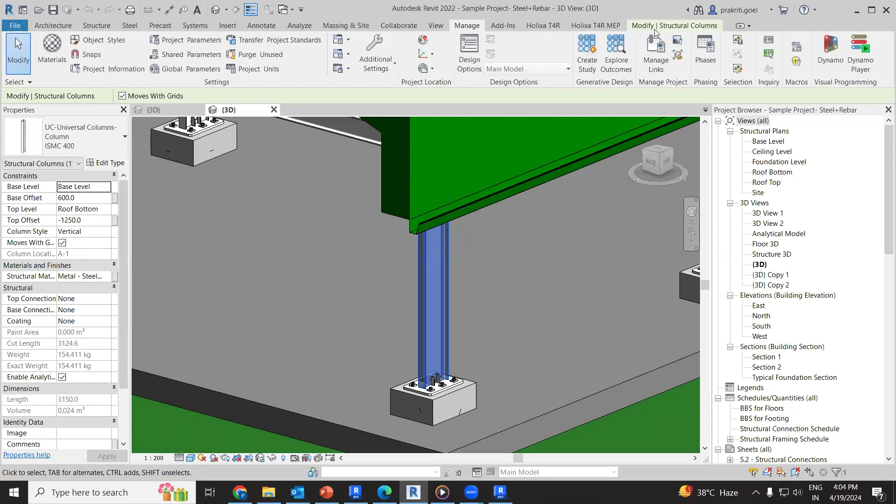So if you want to split them and then provide the connection, you can do it in 2025 as well. What I can do is go to the modify tab, modify panel, split element, and now you can see we cannot split the whole column here. But in 2025, that has been enhanced.

So what I'll do is open that project. Right now this is the 2025 version, so I can just split the column over here. The column has been split, and now what we can do is provide the connections in between them, so that it can be created as a module.

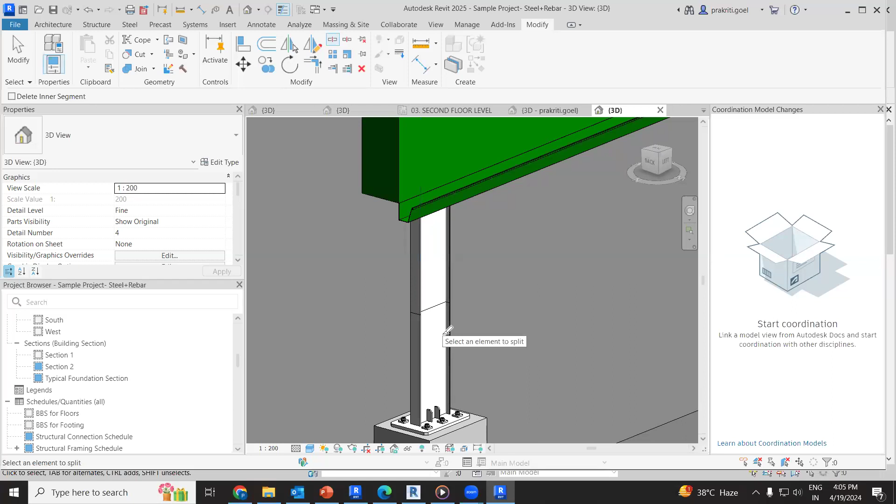Like this, like this, right? So these are the basic enhancements.

Now, if I talk about interoperability, IFC exporters - if you are working in a separate file and then going to Revit, you have to export your IFC, for changing the standards of your project. So IFC exporters are now enhanced, and this is important: to provide the exact coordinates of the site, we have GIS coordinate systems in the location settings.

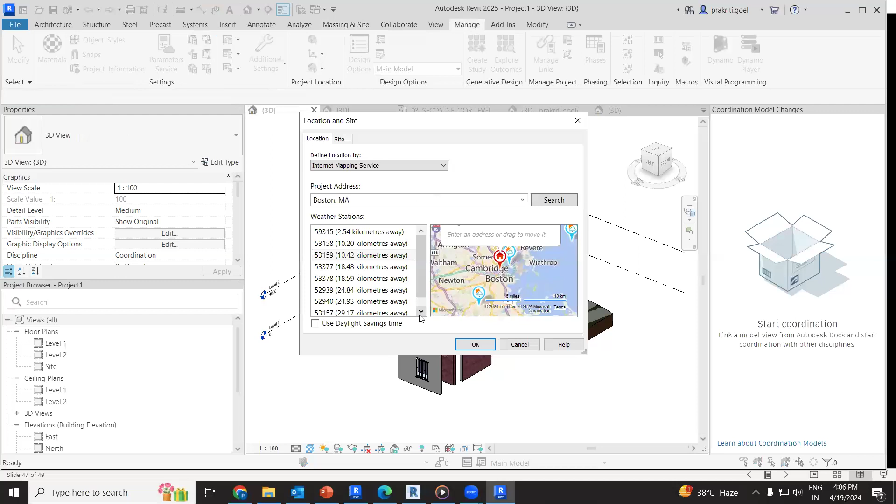So if I go to any site, any new project, I can just go to the manage tab, project location panel, and then location. Over here there are two ways to provide the location: one is through maps, another is the default city list.

So this is actually the default list. What I'll do is open a new project. Over here you can see 'get location from survey point.' This is the important one here.

This has come in the 2025 version. So what I'll do is go to manage tab, project location. Over here, if your file is geolocated, only then will it work.

So let me open a sample project. Let me open - yeah, this one will be perfect. So if you have well coordinated files, with coordinates according to the survey point and project point, if you have provided that, these locations will be there.

So for the GIS coordinate system, if you have acquired the coordinates from Civil 3D, according to all the information you've provided, you have to provide the GIS coordinate system code. Over here, it is actually taking all the information through the survey point.

So one option is the default city list, where you find all the cities and provide the latitude and longitude - that's just generic. Another is internet mapping services, where you choose the correct location from the maps, and get location from the survey point - if you have provided the exact coordinates of the survey point, it gets the information from that, so only then will it get activated.

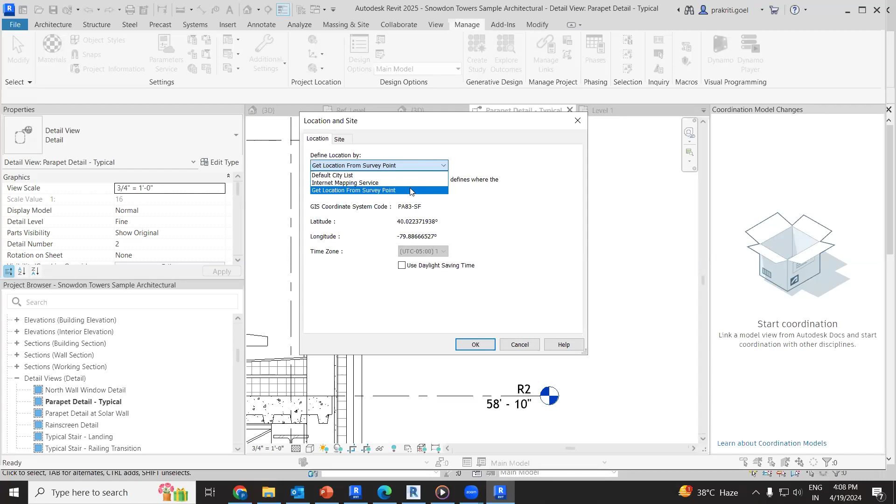Next is the last part, which is the most important thing: model coordination. If you go to Revit 2025, in the collaborate tab we have this coordination model changes feature. It gives you whatever changes have been done in previous versions of the linked file, with exact details.

Version control and version comparison is done in Autodesk Docs, but now for 2025, you don't have to go again and again to check what changes have been done in the file. You just have to open that Revit, open the coordination model, link the coordination model, and then you can check it.

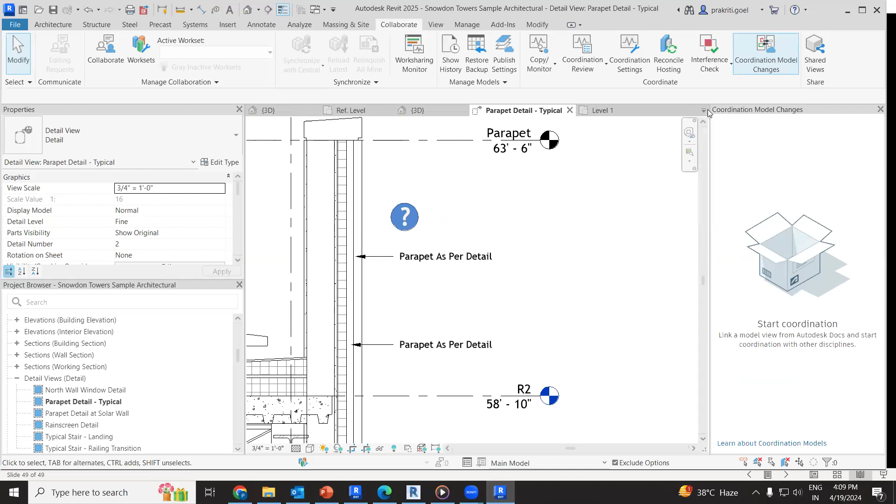So in that case, what I'll do is open a project. I'll open this, and then link the coordination model from Autodesk - it can be a Revit model or a Navisworks model. So we need to first select this specific project.

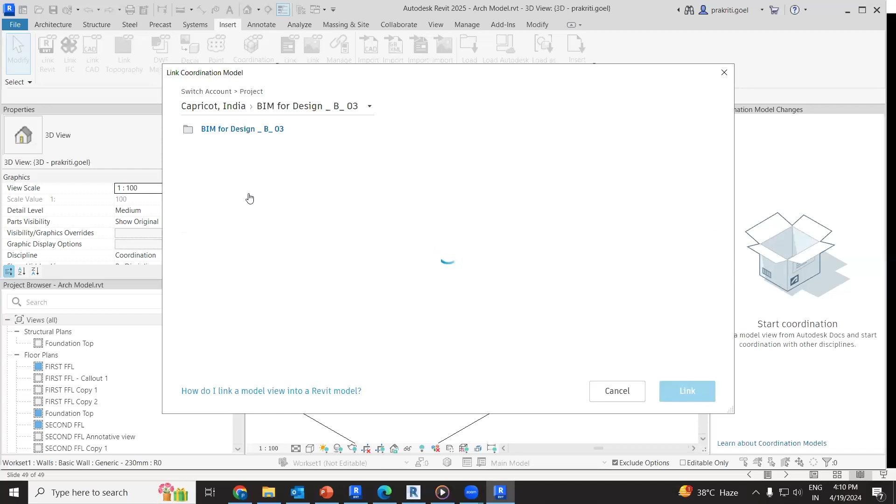And then I'll go for the structure model. So you can see it is actually a version 2. If I select this, I'll just go for link.

So you can see the coordination, the actual Revit coordinates are not coming out right. But again, you can see in the collaborate tab, coordination model change. You can actually check over here. So no changes displayed means in this coordination model, if you have the version comparison, you can see the v2 is there. That means the structure file doesn't have any changes.

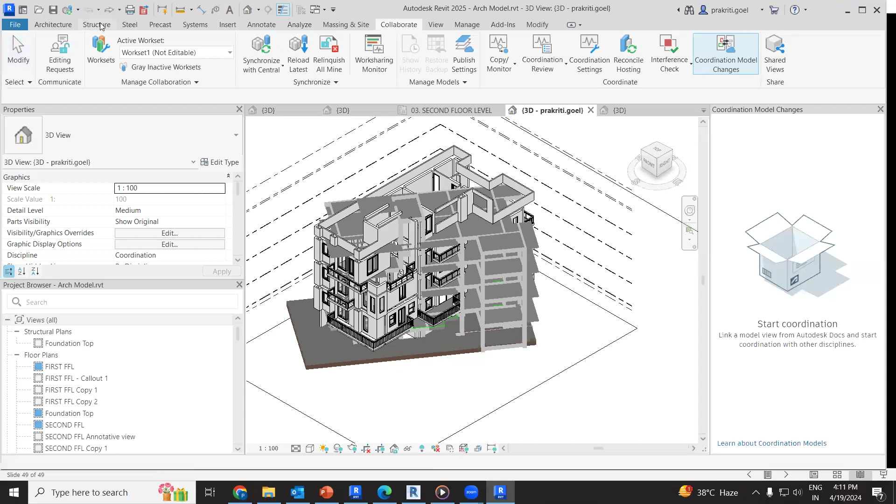So if I do it in reverse, if I change this, if I link the architecture model in the structure model, let me open that. So I'll be opening the structure model and then linking that. If you see over here in the architectural tab, the version of the architecture is current. You can check over here. So otherwise, what I'll do, I'll just open the structure model.

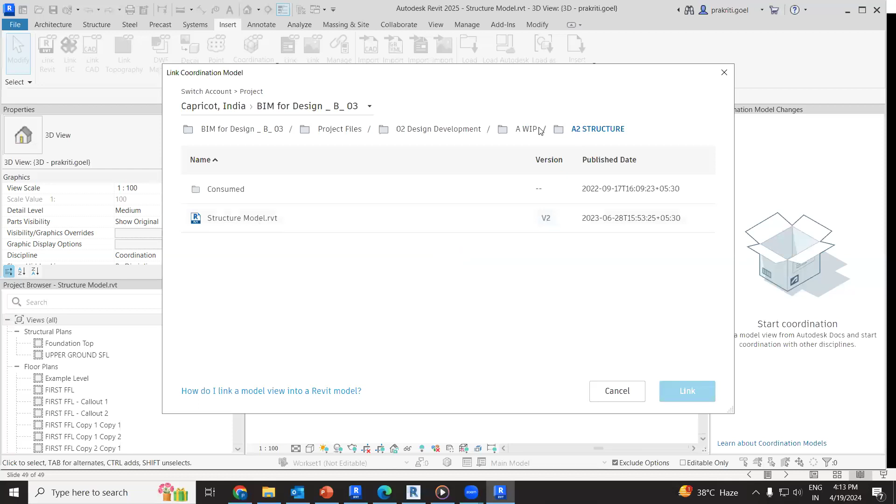Right, so now this is the structure model. So what I'll do, I'll just link the architecture over here. You can see the architecture model is actually V5, right? So I'll select this and then click on link.

Right, so recently the changes are not there. So once there's any changes, if you see over here, select the coordination model. So I need to select the coordination model, and you can see it is comparing the two different versions, like V5 and V4.

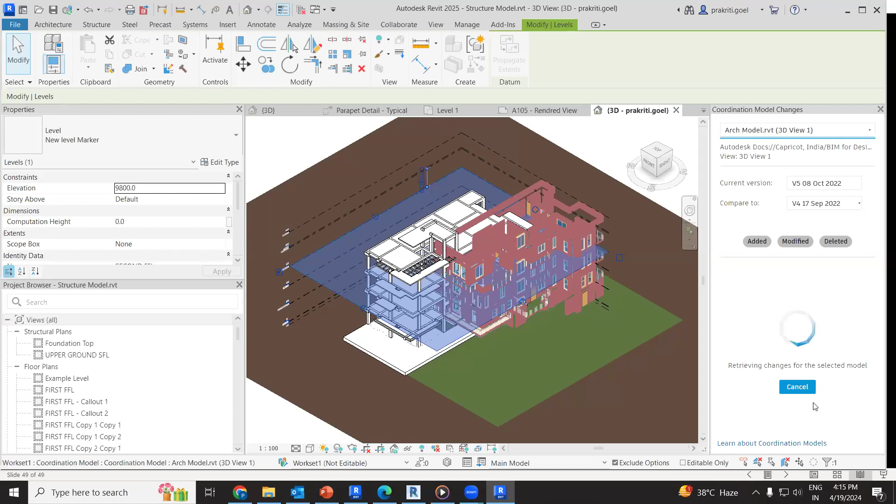So what changes are there? What changes have been modified? What changes have been deleted? So you can actually create a record out of this. You don't have to open docs like Autodesk Docs. For version comparisons, you just have to open Revit and then link the coordination model. That's it to check what changes are there in the coordination model. You can see over here, right?

But if I talk about going to the docs, if you want to check what is happening in your project, what changes are there, you have to go for your Autodesk Docs. And if you want to check what is happening in some other file, some other service - let's say if architects have shared the file with you and you are the structure consultant - you can actually use coordination model checking, like coordination model changes. This actually helps you for version comparison of the linked file.

So these are the basic changes that are there in Revit 2025. These are the enhancements which will help you in more efficient creation. So till this, right? If you have any doubts, we can discuss. So right, thank you.

No, currently there is no option to save the Revit file in a lower version. I hope they will work on it in the future, but right now there is no such option. You can just go for the IFC exporter for converting it to a lower version, but it might delete some of the major components in the Revit file. So that is not preferable. Again, right now there is no lower version command or option available.